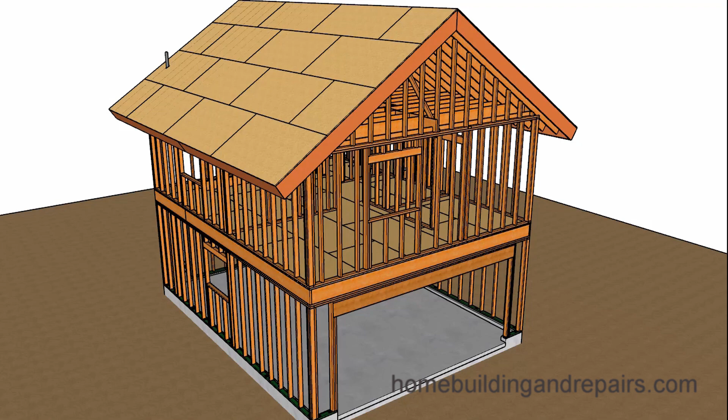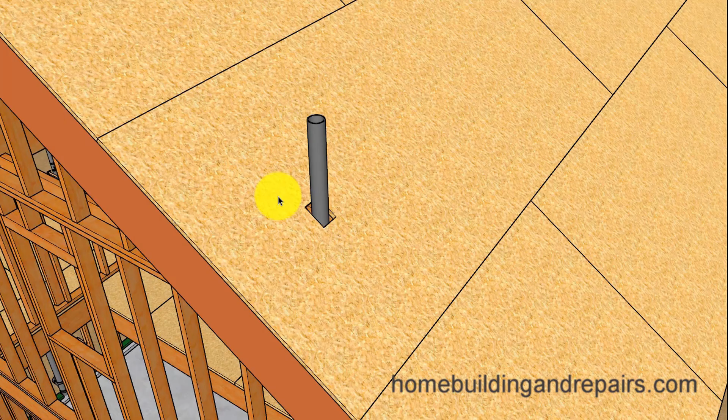In this video, I will provide you with a few examples on how to install the rough plumbing for our two-car garage with the loft or apartment. We'll start with the vent sticking out of the roof sheathing, which is for the wash machine and will have a 2-inch pipe.

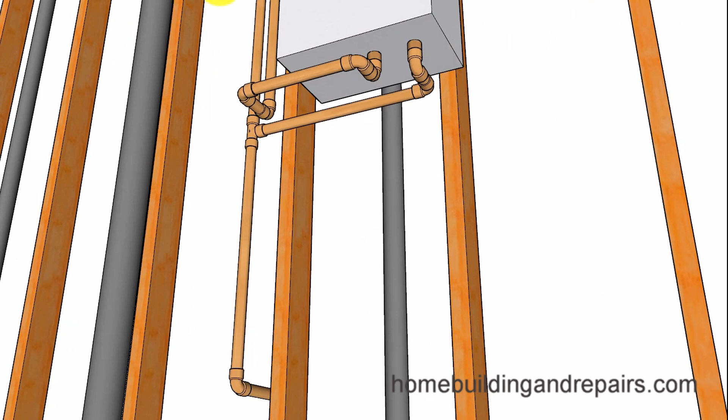Even though it might look like I'm going a little faster through this video, I've cut it up into a few sections, so you're going to get a lot of different views, and some of them might be the same throughout the video, except we might not have parts of the foundation or framing. I might make another video with more information about things on this same project that might save you a few dollars.

Here we have the kitchen drain, hot water, cold water, going around the wall framing stud. For those not familiar, you're usually not allowed to drill through a 2x4 wall where you have the king stud and jack stud. That might severely weaken that section of the window and wall framing.

Now would be a good time to point out that you should check with your local building department and plumbers in your area to verify all of the information in this video.

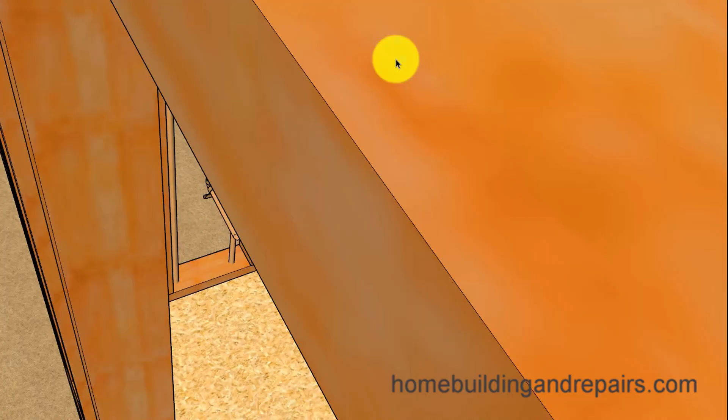Here we have the bathroom sink along with the toilet and the water supply for the toilet and our bathtub. Another thing you want to do is keep all of the plumbing inside of the wall framing and floor framing if you possibly can. That's another important part of installing plumbing.

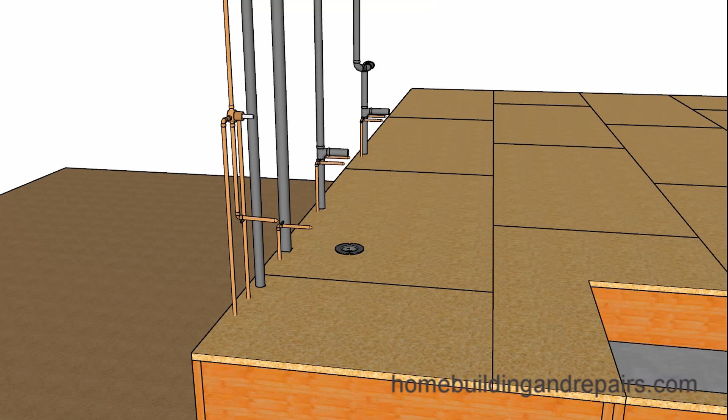As I said, we are going to be removing some stuff to provide you with different views. Here you can see what the plumbing vent pipe for the bathtub, toilet, bathroom sink, and kitchen sink would look like without the wall framing, along with our vent for the laundry or wash machine.

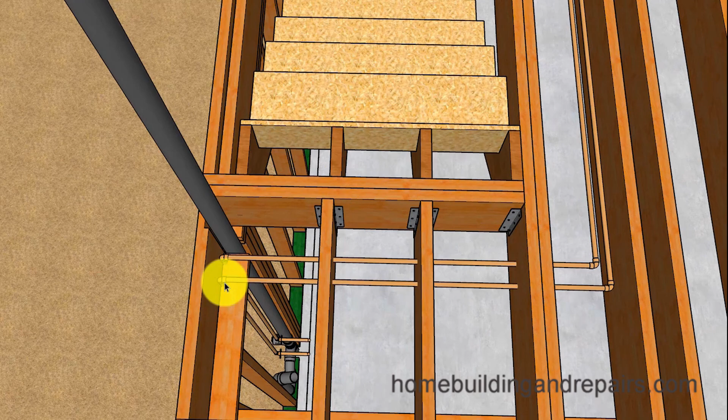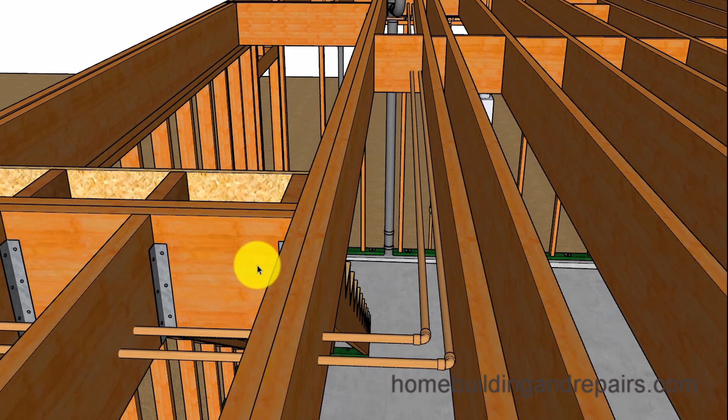Next, let's take away the floor sheathing so I can show you how the water supply pipes will go through the floor framing joists, and how you might need to notch out some of the framing to install larger pipes like the 2-inch pipe for the wash machine. In a moment you'll see you won't need to do that for the smaller pipes used for the bathroom sink or kitchen sink, which will have a 1.5 inch pipe.

So we are going to be drilling through the floor joists so we can run our water supply pipes in the floor framing, and we will be building a little ceiling or soffit to cover the pipes that will be sticking below the joists.

It's often easier to do something like this in a garage where you're not worried about the ceiling. However, I rarely see plumbers do it, and I think that's because they're trained to keep everything inside of the floors and walls. In my opinion, you can do this and install all of your straps on the inside for the framing plates, so they won't create any problems for the exterior or interior finished materials like siding or drywall.

Of course, you can save some time by not drilling as many holes through all of the framing materials. That's another big plus with doing it this way.

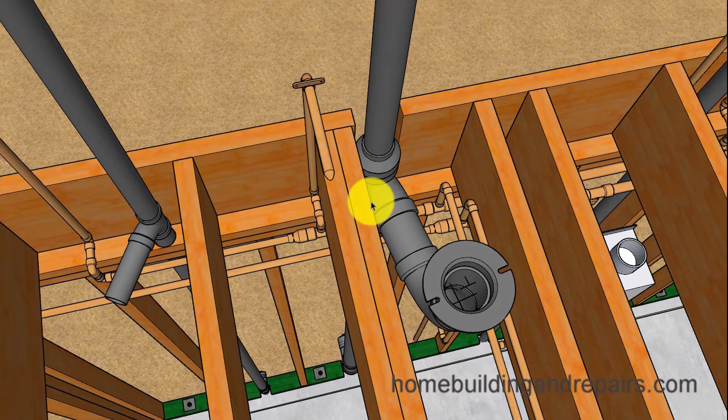Next, let's take a look at the bathtub drain and water supply pipes: hot and cold water along with the shower valve. We'll have the lower section here for the bathtub and the upper section for the shower head.

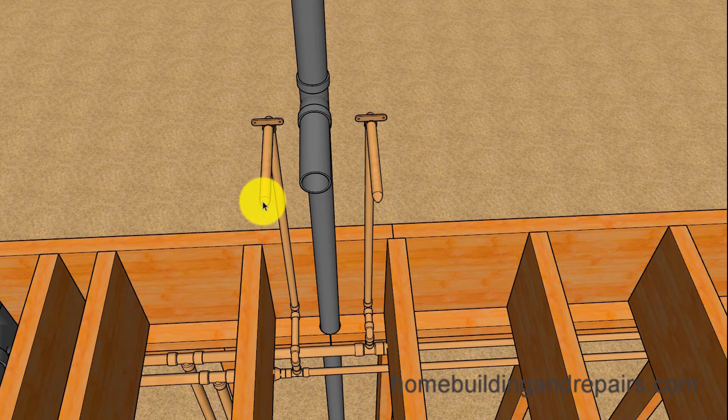Next, let's take a look at the sink here, and even though I won't be providing details, I want you to go through the video and check out how the hot water is going to be on the left side of the fixture, and cold water on the right side.

However, if you mess this up on a sink, it's not really going to be that big of a deal. You can just get longer hoses to connect the water supply to the faucet. Instead of having the connection hose go straight up, it'll simply crisscross—this one will go over to here, this one will go over to here. Trust me, I've had to do that myself a few times.

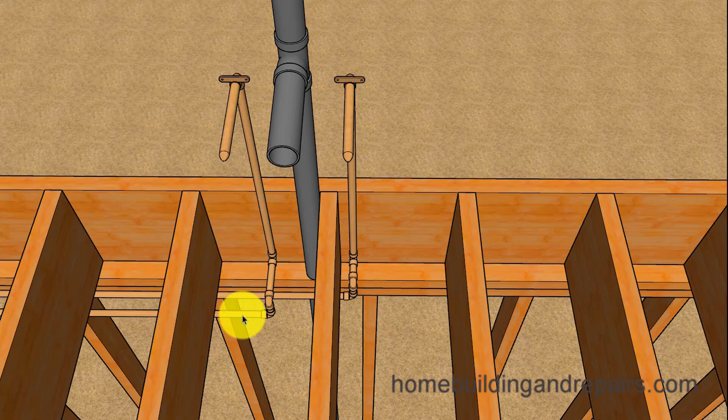And of course, the kitchen sink, the end of the line for our water supply pipes. Let's go ahead and pan out a little bit to give you a view of everything there.

Then we will remove the floor joist so we can get a better view of the water supply pipes without all of that stuff in our way.

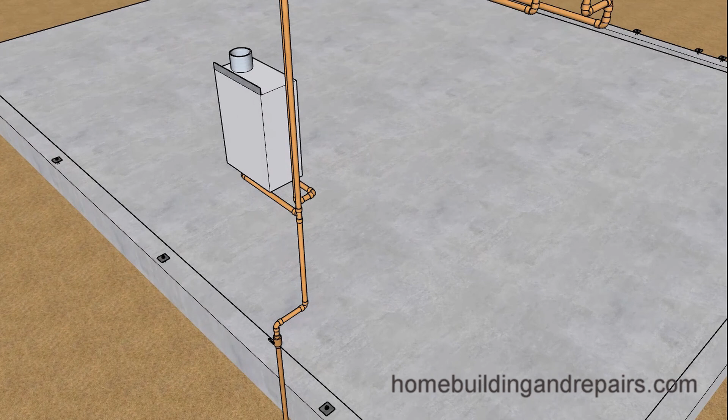So let's go ahead and start with the water supply coming in, cold water coming in to a gate valve, or a valve that you can use to shut off the water supply to the garage and the apartment. So cold water going up here.

Coming up here, cold water is going to continue up to feed all of the cold water for the rest of the building. However, it's also going to branch off and go through the water heater, and of course, this is where our hot water comes from.

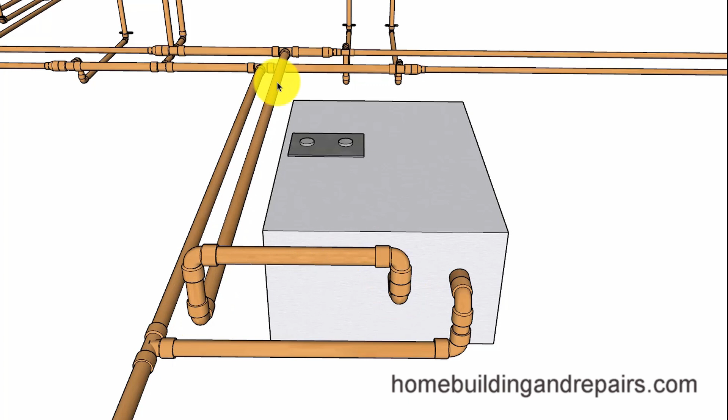The cold water will go into the hot water heater and then come out nice and toasty. At least that's hopefully how it's going to work.

Now, here's something I like to do, especially on a job like this, even though it might not require it, and that would be to use 3/4 inch pipe to allow more water to flow to certain fixtures.

Now, if I'm going to a bathroom sink and a kitchen sink, I could probably get away with just running 1/2 inch lines from this point here and this point here. So you're going to want to think about that when you're reducing the pipes down as to where you're going to position the reducer.

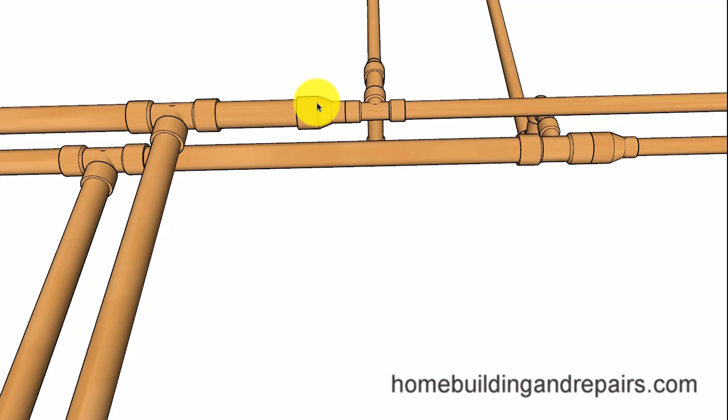Before the pipe going to one of the supply sides or on the other side. And this might not make a difference here, especially if we are using some type of water saving fixtures that will also be reducing the flow rate of the water.

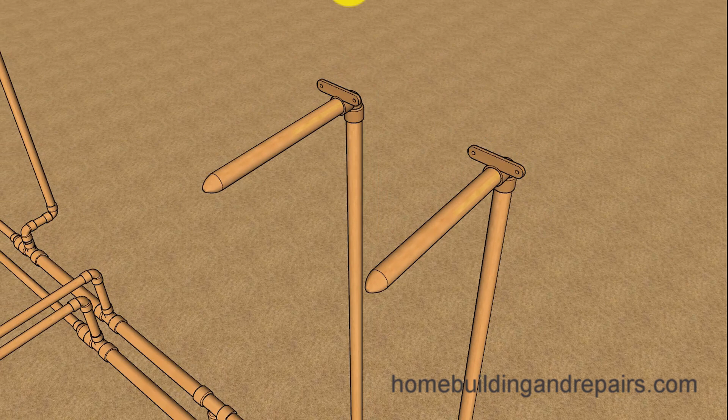And this will also be something you will need to consider when planning what size pipes you're going to use. So again, 3/4 inch pipe going here. We got 3/4 inch pipe here, reducing down here after we get past the washer and dryer lines.

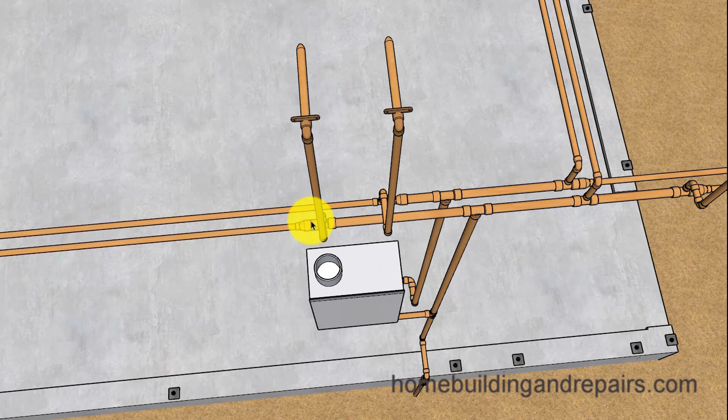And then reducing here and then reducing here down to 1/2 inch to go to the kitchen sink. And then here we have our stub outs that will be cut after the water pipes have been tested or filled up with pressurized water.

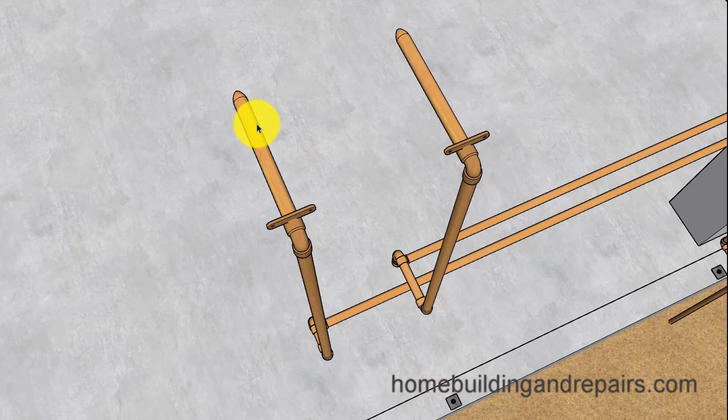And then after all of the walls have been finished, cabinets have been installed, we can go ahead and cut these pipes off to install our water shutoff valves.

Next up, let's take a close-up view of how the 90s are working here. And even though I'm sure most of the people know this, you can always stop the video, pause it at any time if you need to examine something a little more carefully.

And of course, this is what I was talking about when I said that it makes my wife a little happier to reduce after the toilet, to avoid a problem that you might not be dealing with low flow shower heads.

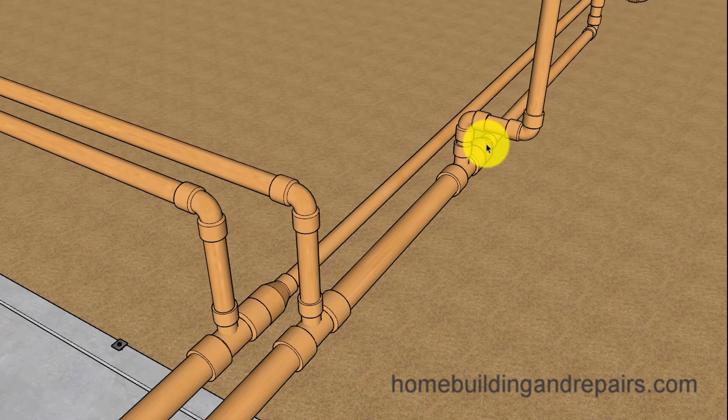However, years ago, it wasn't uncommon to have someone in the shower and then someone else flushing the toilet, only to create a temperature change, and then within a few moments someone in the shower screaming because the water temperature got a little bit warmer.

Because instead of now having water dedicated to only the shower, you now have water going to the toilet and the shower.

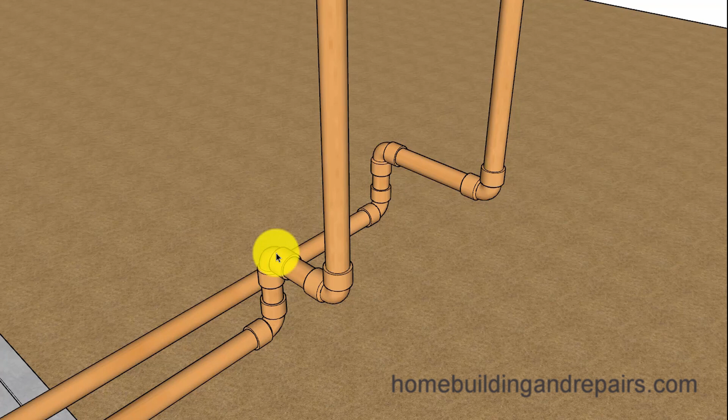And I know some of you think, wait a minute, who's going to use the toilet when someone else is in the shower? Because a long time ago, when we only had one bathroom and 6 or 7 people living in the house, it wasn't uncommon to have someone in the shower while somebody else was using the toilet.

And that might be a little too much information for most of the viewers. But what can I say, huh? Just trying to keep the video entertaining.

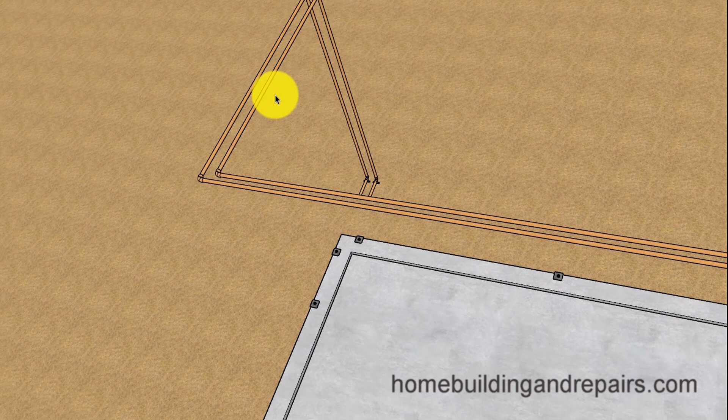And of course, another view of the water supply lines to the wash machine.

Next up, let's go ahead and bring back the drainage pipes. And we are going to take a look at what the drainage pipes might look like without the concrete slab in the way. And we are going to be using a 3-inch pipe here, along with our combo fitting, reducing it down to 1.5 inches.

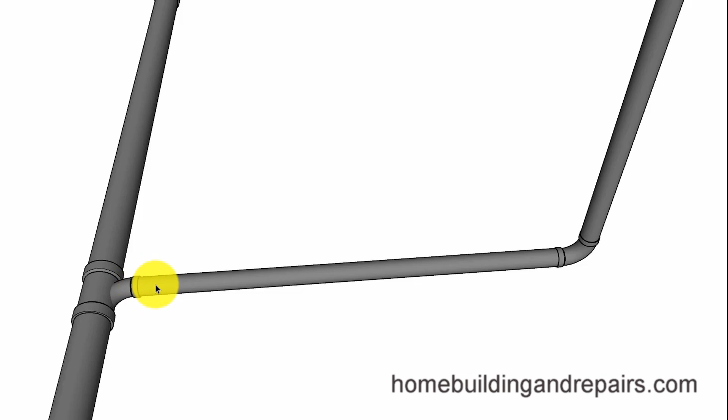And then using a sweep fitting or a long 90. This will happen over here also, kind of the same setup, 1.5 inches to pick up the bathroom sink.

And then a 3-inch line going to the toilet with a clean out, along with an 1.5 inch line coming off for the bathtub. And we are going to have 2 clean outs here.

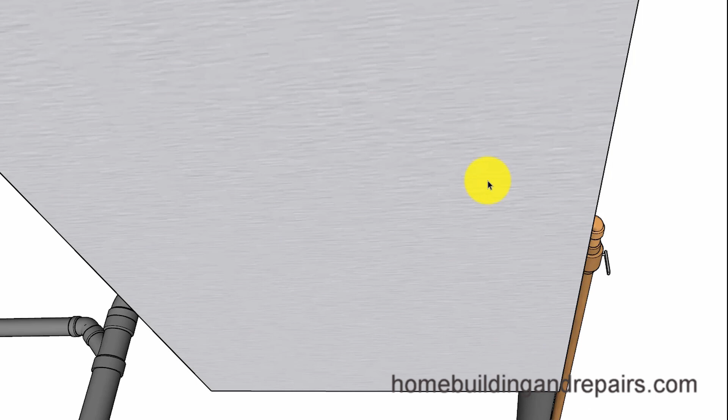We're going to have one for the toilet line and one for the bathtub, even though you're probably thinking, wait a minute, what do we need something for just this line here? However, I would install the clean out, and you might consider installing a clean out on each one of the lines here. However, I will leave that up to you.

And of course, our toilet, reducing down to a 2-inch vent pipe. Everything else over here is going to have an 1.5 inch vent.

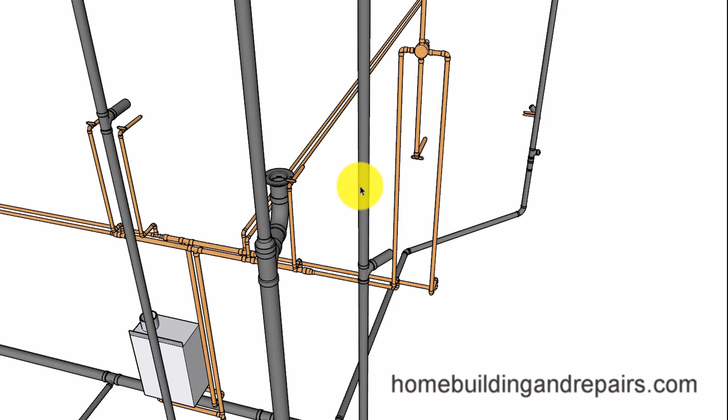And I am also going to go through the roof with each one of these pipes instead of connecting them together inside of the attic, to provide you with another example of something that might be easier for you to do, including the kitchen, where we have our drain line here and then our vent coming up and around the king stud.

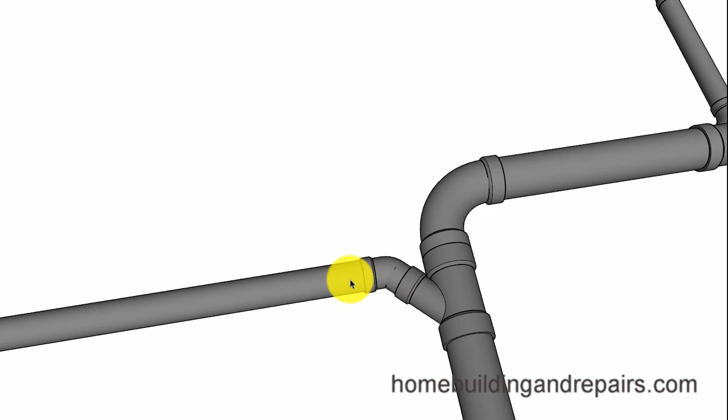So we don't have to drill through it. And then we're going to need a 2-inch pipe for the wash machine drain, along with a 2-inch pipe for the vent.

And hopefully by now I have provided you with all of the views or angles that I possibly could for this project so that you can get a pretty good look at how the plumbing works. So let's go ahead and wrap this video up.